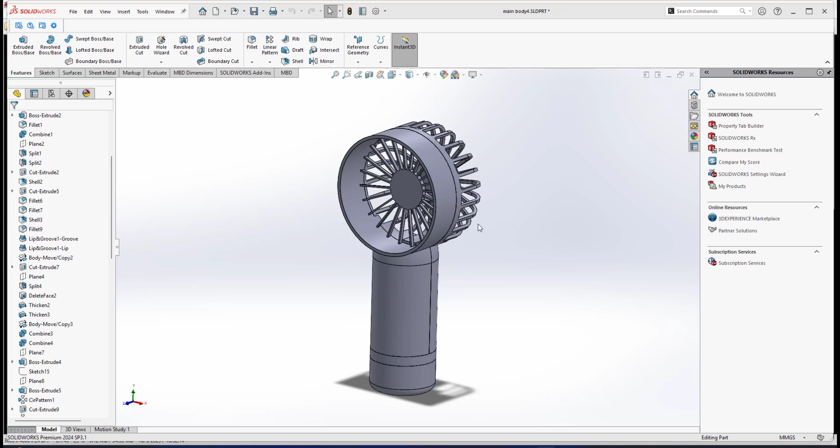Alright, before I proceed in this video, I just would like to say that I have made a few adjustments here. If you see here, my wire channel that I've done is a little bit lower since I've changed it. If you look here under the features, somewhere at the beginning I do a revolve. In my previous video, I made a thickness of 4mm. I changed it to lower, which is 3.

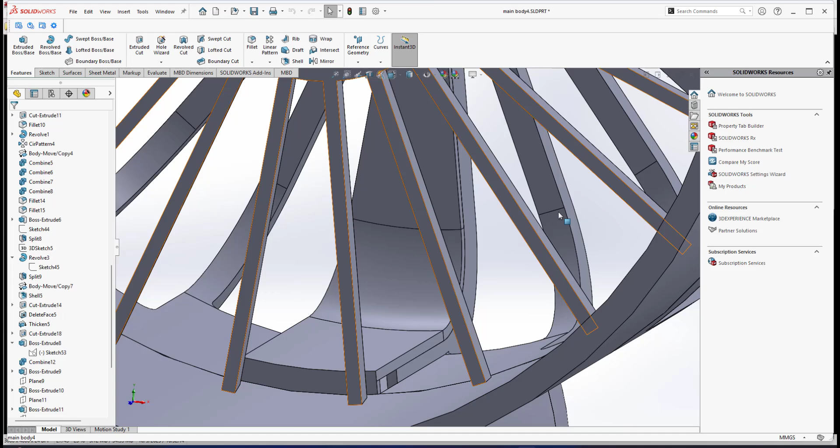So it means that the wall for the wire channel is a little bit lower. Before this, when I made it 4mm, it was too high. So I changed it to 3mm. So this is the adjustment that I already made.

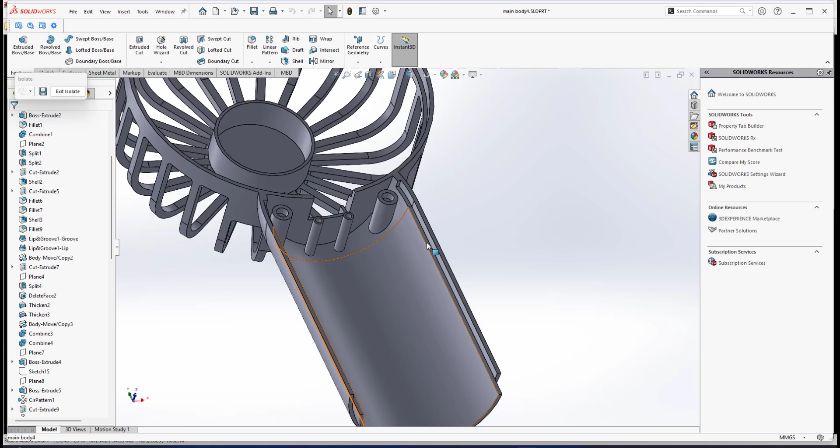Alright, in this video I would like to show you another feature. If you look at the front casing, in my earlier video, my rear casing and my front casing are jointed by this. If you see at this rear casing, we have a groove, and the front casing we have a lip. This was already shown in my part 1 video, how I do this lip and groove manually.

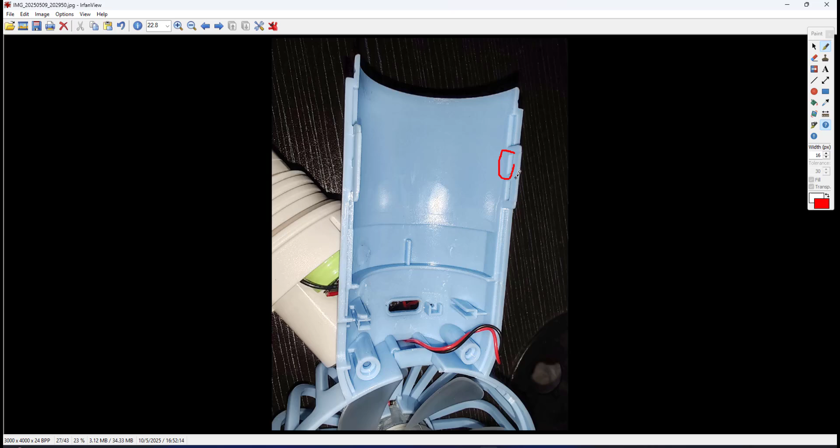Actually for plastic casing, it's not just this feature to joint the front and rear casing. We have another feature. If you look at this photo, this is the rear casing. We have a cutout. This is what we call the groove. And if you look on the front casing, we have the inverse. We have a hook. So the feature is called snap hook and groove.

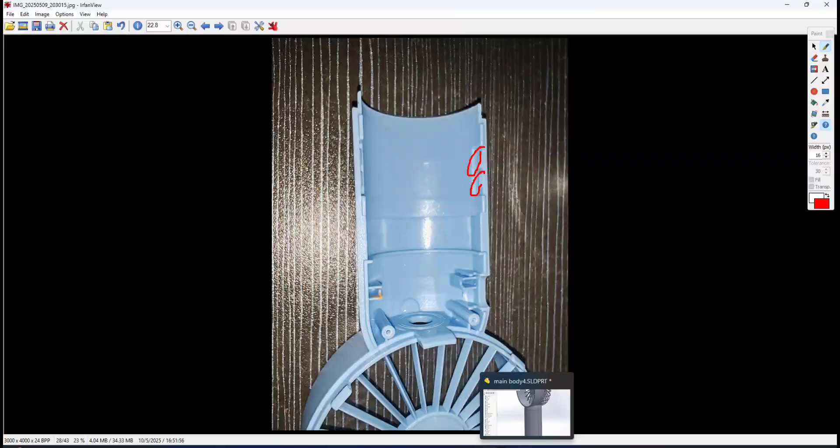But since I want to make a simplified version, I will not follow the same as what is shown here. I make another version of snap hook and snap groove. Alright, let's just watch my video. I do it differently, a simplified version, not the same as what I have in this photo.

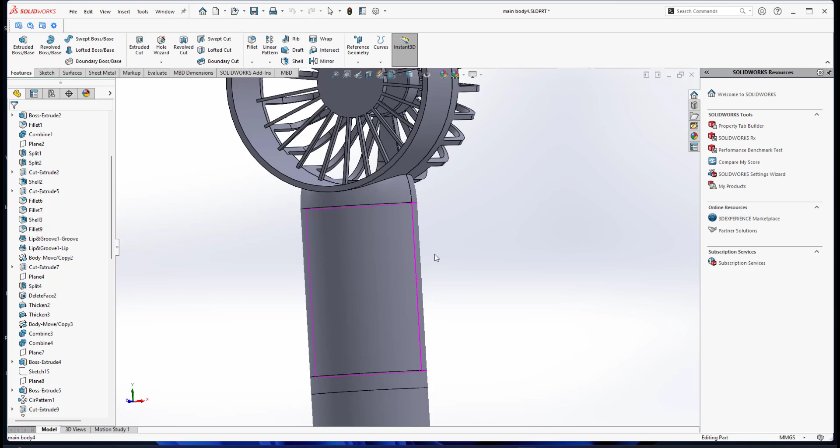Actually in SolidWorks, under Insert, we have fastening features: snap hook and snap hook groove. But I found out when I use this feature, the way SolidWorks does the snap hook and snap groove, the outcome is something I quite disagree with, because it's not the settings that I want. So in this video, I'll show you the simple way instead of these standard features in SolidWorks.

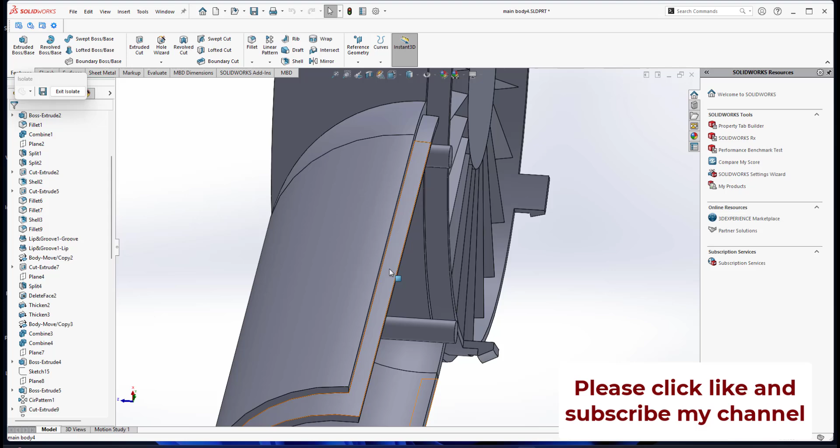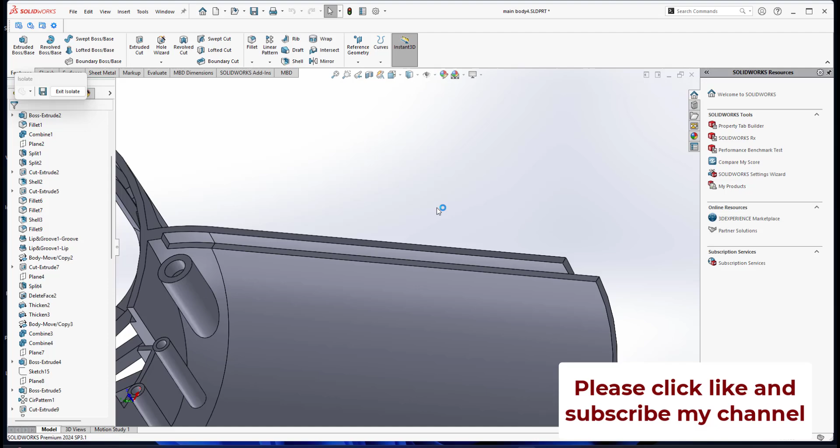Alright, to do this, on the front casing I will create a hook, since the front casing has a lip. I will do it manually with a triangle shape, like a hook. If I have a hook on this lip of the front casing, the inverse at the rear casing will be the cutout, a triangle groove, the snap groove. So on the front casing is a snap hook, and at the rear casing the snap groove.

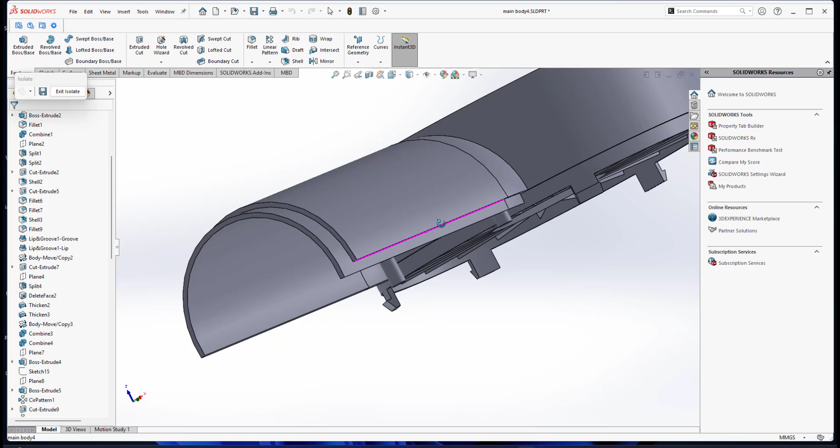Okay, let me focus on this front casing. I will create a snap hook, kind of like a hook shape, meaning the triangle follows this way. I'll show you in this video. If you look here, my right plane is really at the middle there.

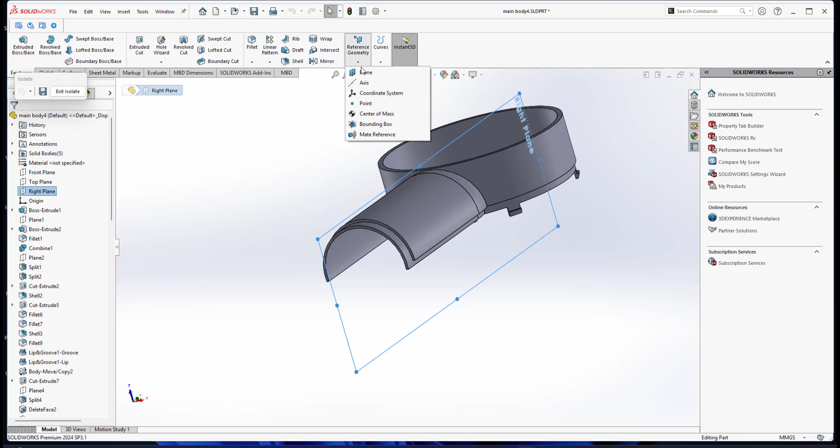So I will use this right plane as a reference to create another plane. As long as I put a distance a little bit further away like this, this new plane will be my reference to create a hook for this lip of the front casing. Alright, so I create a sketch on this plane. It goes in this direction, that's okay. Since I want to create a triangle, first I create just a rectangular shape.

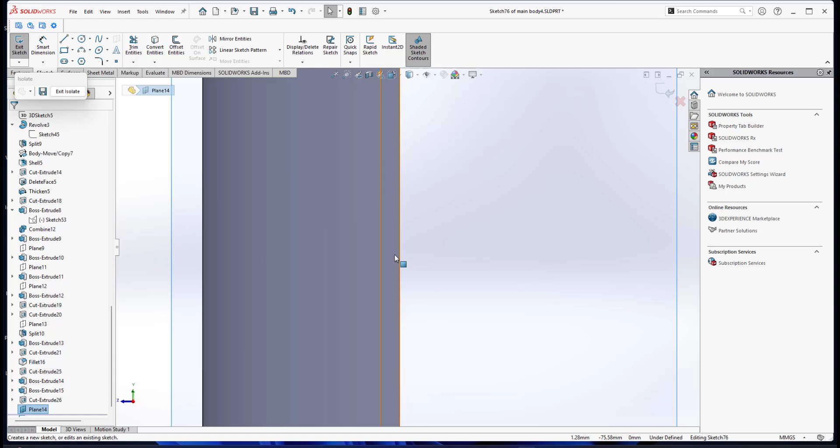Okay, if I create a rectangular shape, I cannot snap at these edges. I found out when I do boss extrude from the surface in which I want to create a snap hook shape, extruding this rectangular shape produces an error, so I need to put some distance as long as it's not touching the edges. Let me delete this first.

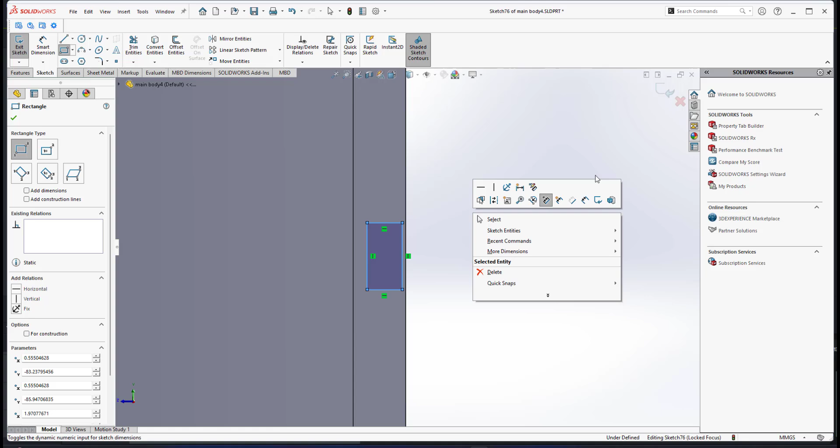Okay, I do the rectangular shape, so I make something like this as long as it's close to that edge, and I put a dimension. I cannot do this edge and this edge. If I put it 0.1, it kind of makes this thing driven, so I just go for the dot here up until this edge.

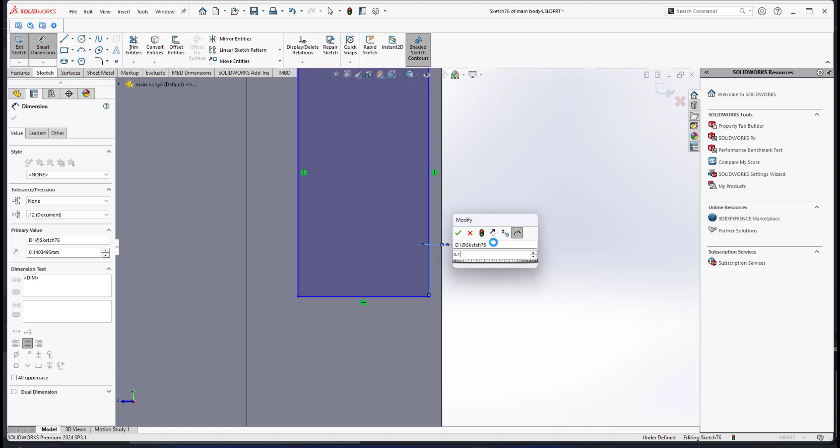Right, I will create another rectangle here, so it means I have two snap hooks. So I create a similar rectangle. First I select the relation of this one. I select this edge and this edge, and I make it collinear, so it means inline. And also this edge and this edge I make collinear, so it's inline.

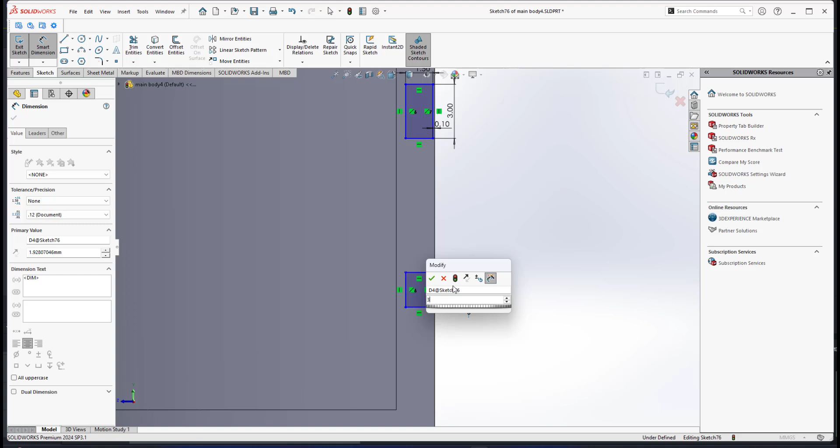So I just give the dimension. This one is 3, right? So I don't have to put this length as 1.5 since I already have the relation. The only thing I need is the distance from here to here, which is 10 millimeter. Later I can adjust it. I simply guess it. The distance between the two keys is 10 millimeter.

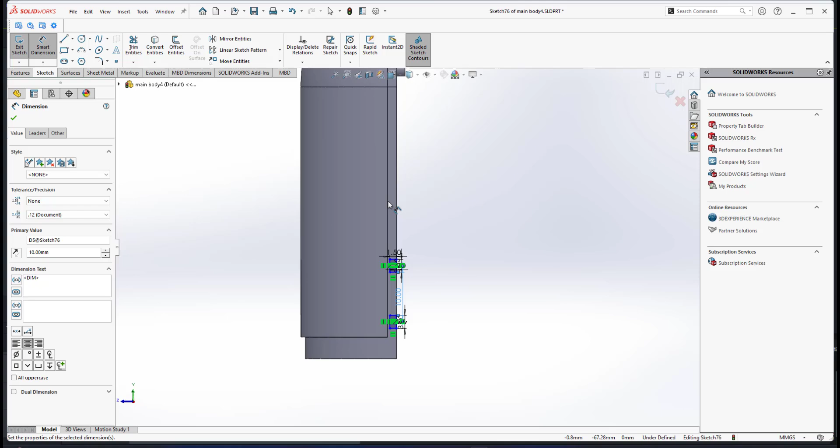Alright, it's still blue color because I have not yet provided the exact location. If I go from this point here to this one, I put it 80 millimeter. Later I can adjust it. I simply guess the position of the snap hook. Okay, now I have this thing.

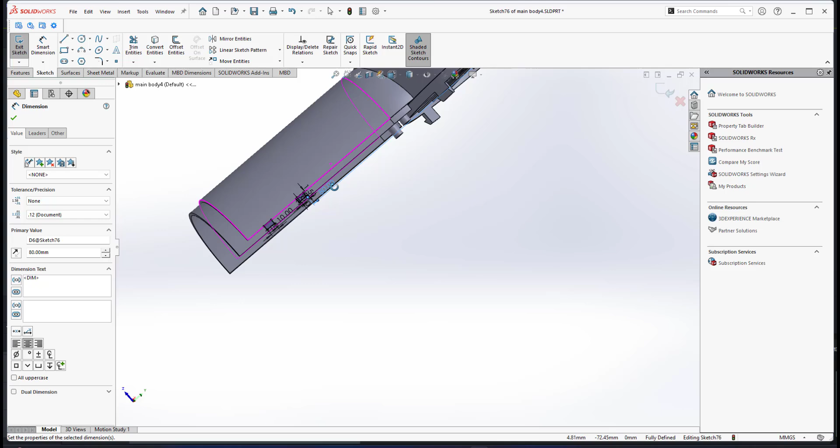Okay, as you can see here, I will create a snap hook feature. I have these two cross sections of this rectangle. So in features, I will do extrude. Extrude by default starts from the sketch plane. I'm not using a sketch plane. I go for the second option, start from the surface. I want the snap hook to start at this surface of this lip.

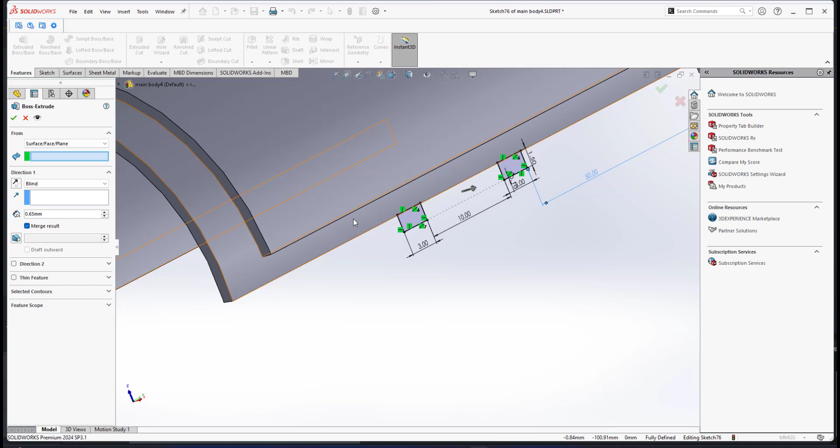So I have the preview there. It starts at that one. I will not click merge result, since I want to make it as separate bodies. Later I will show you why I make it as separate bodies, right? The distance that I want is not too much, about 0.65.

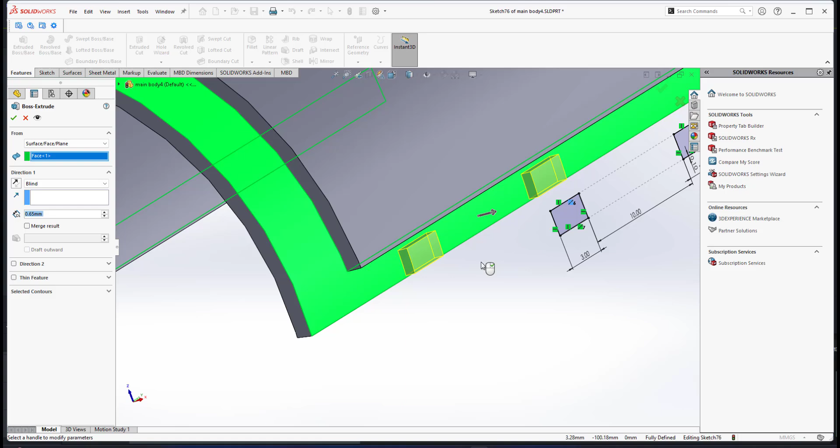It's less than half, since the thickness here is 1 millimeter. So it means a little bit, not more than 1 millimeter. So I put it about 0.65. All right, 0.65. Okay, then I uncheck the merge result. I want to make it as a separate body.

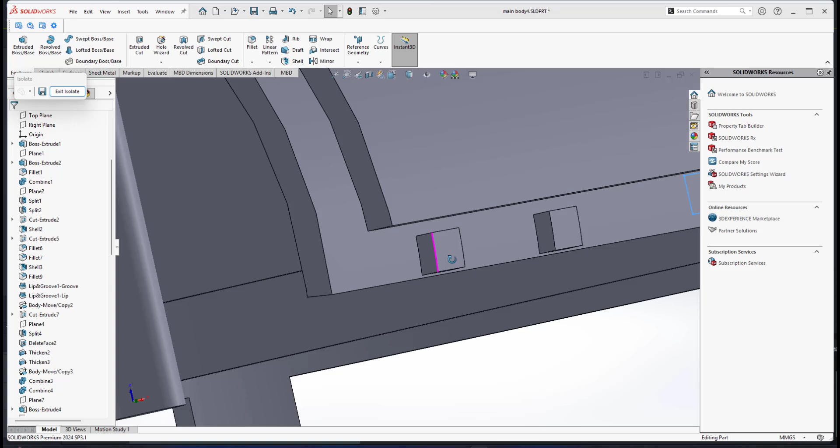So now, if you look here, I have this. If I exit my isolate, I have these two rectangular boxes. If you look in the list here, I have two of these: the first rectangular box and this one. So I isolate these two boxes, these rectangular boxes.

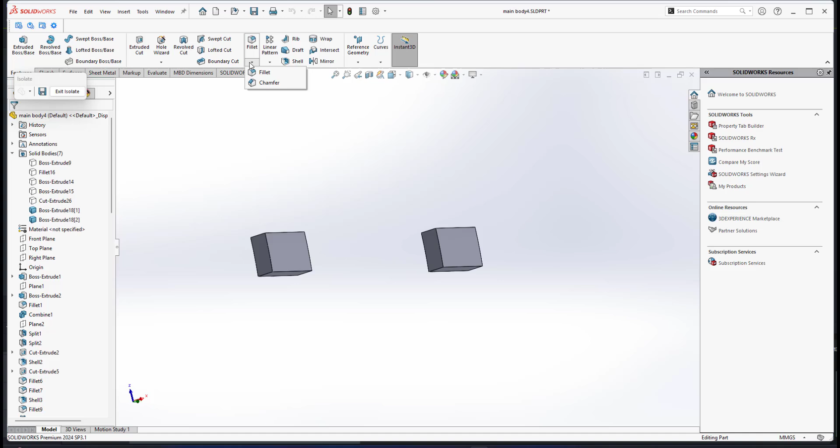So I will do chamfer to create a triangular shape, the shape of a snap hook. Okay, I will do chamfer. For chamfer, I'm not using the first option. I go for the second option, distance 1, distance 2, and I'm not going symmetric. I go for asymmetric. Distance 1, I already played around, is 1.7, and distance 2 is 0.5.

If I select this edge, I have this kind of cutting, which produces a triangular shape. And also I select this edge as well. Okay, maybe go one by one. Let me do it one by one. I click this one first. Okay, so this is my first triangular shape.

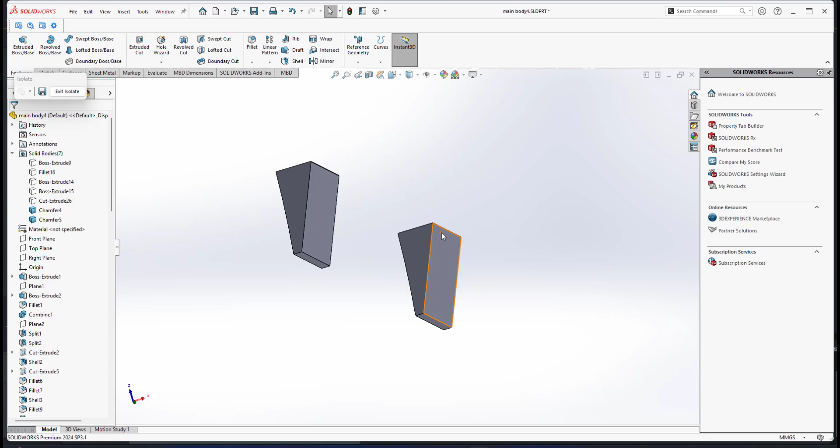So I go for another one, chamfer. I'm using the same thing, the second option, asymmetric, 1.7 and 0.5, and select this edge. So I have this shape. This will be the shape of my snap hook. All right.

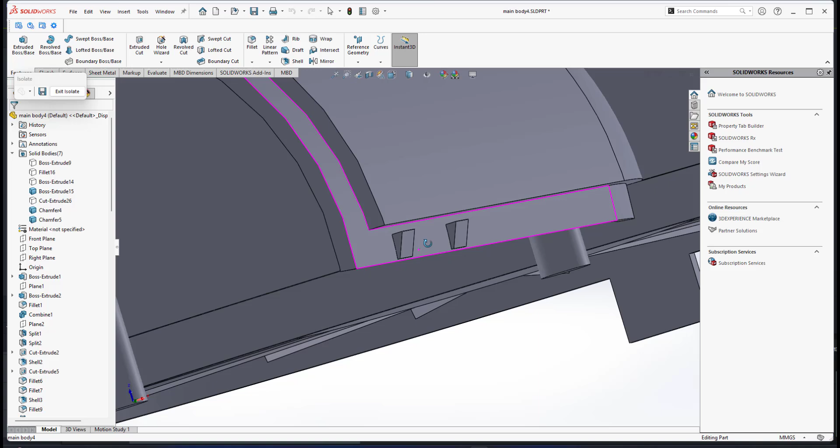If I exit, I select this one, it is attached to the... Okay, if I select the front casing and also the two snap hooks that I just created. So this is a separate body. So I'm not merging this as one by using combine add.

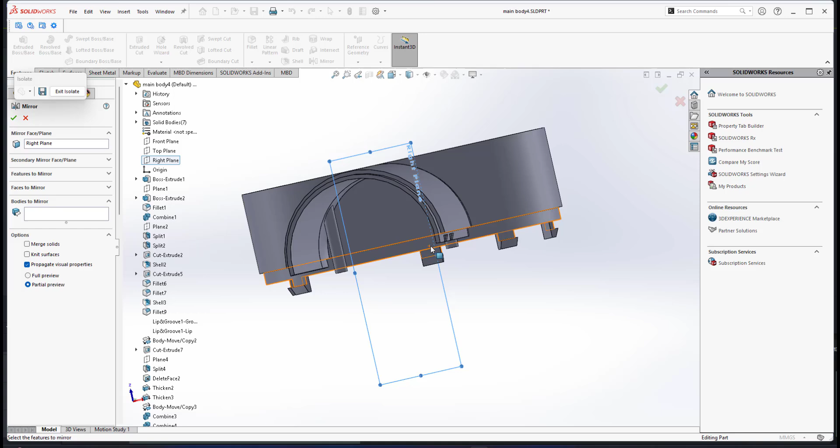So what I will do on the other side, I will mirror it. So I will do mirror. My mirror plane will be the right plane, since the right plane is laying in the middle. I'm not using features to mirror, I'm using bodies to mirror, since there is a separate body. Make sure to click on bodies to mirror, because the snap hook here is a separate body.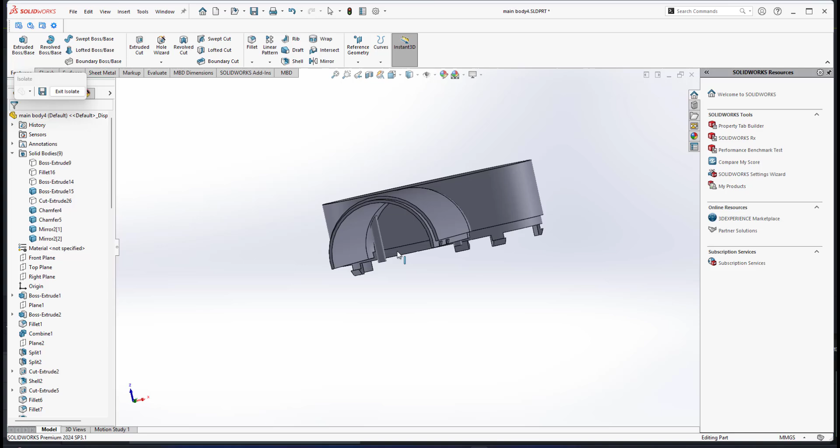So I will select these two snap hooks here. Carefully select this snap hook. So I have a preview on the other side. Then I click OK. So I have 4 snap hooks here. Alright. Okay, these 4 snap hooks, I'm still not merging them into one object here.

I will duplicate it, since the idea is that the original of these 4 hooks will be merged as one to this front casing. The copy version of it will be a subtracted version. So on the rear casing, it will create a snap groove.

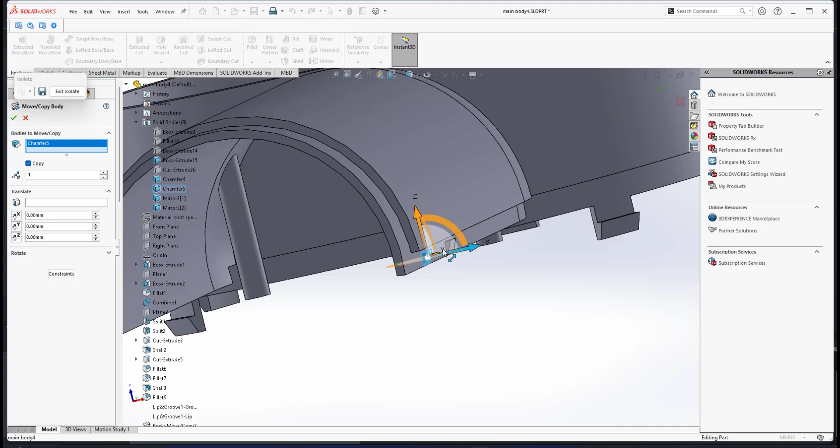Right. So what I will do, I will duplicate it by copy, then make sure copy is 1 and copy is checked. I select the 4, carefully select these 4 hooks that I have just created. So I make a copy version of it, then just simply click OK. Okay, now I have a duplicated version of those 4 keys.

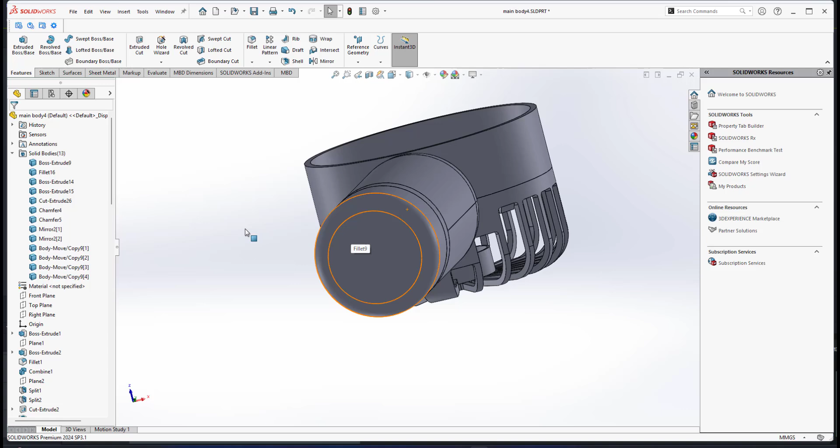Right. So now if I exit isolate, now I will do combine add and also combine subtract. Okay, the original one will be this one, and I select the original here. I will select the front casing and the original 4 hooks that I just created. I isolate it. So this one I will merge as one.

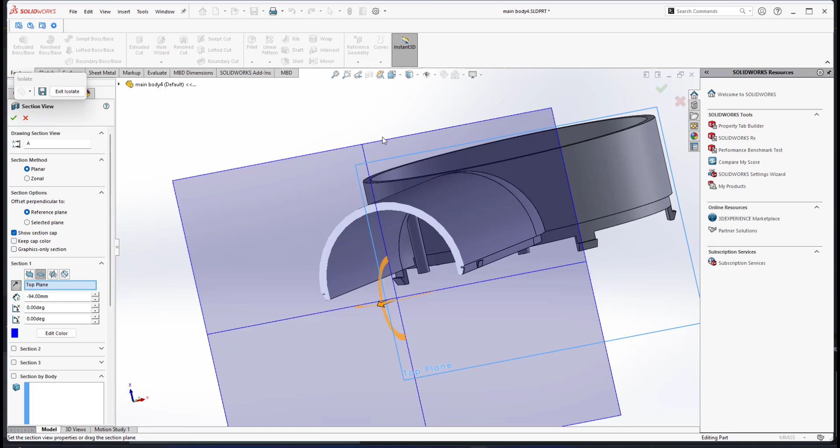So I will go insert features. I will do combine and I will go for add. I select these 4 keys. These 4 keys I add as one. So now it's already one. I just simply check by section view to make sure that the merging is blended together. I don't want any extra edges created.

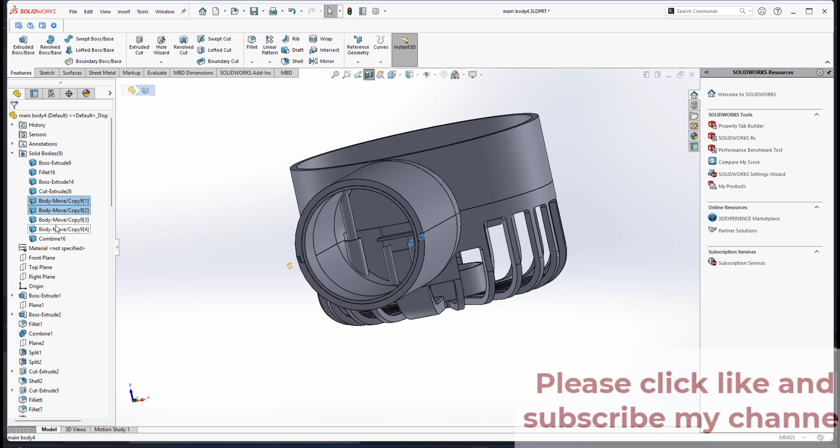If I go for section view, it nicely blends, right? The 4 keys, right? So this will be the snap hook. All right. Okay, if I select the copied version of that snap hook and the rear casing, I isolate it. So this one I will do subtract. So this one will become the groove.

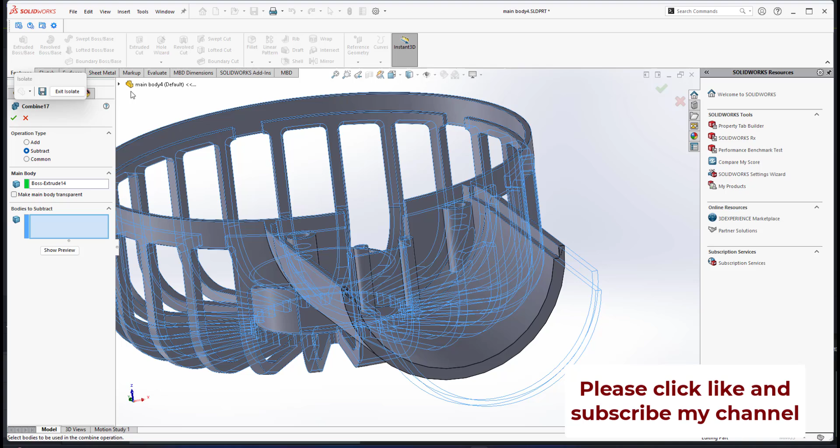So I will go for features, combine. This one I will go for subtract. The main body is the rear casing, right? Okay, hard to see because it's kind of merging inside. So the bodies to subtract, I will select the 4 copied versions of the snap hook. I can select from this list. If I click here, let me zoom out like this.

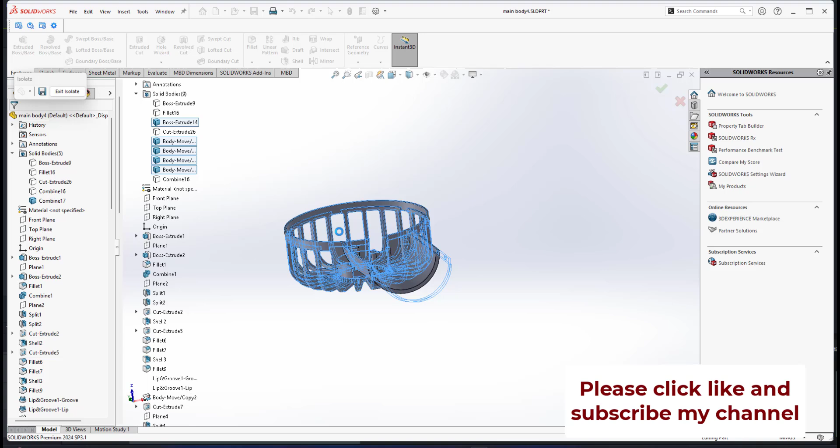Okay, this one body, I select all these copied versions of that snap hook. So this will be subtracted from the rear casing. Okay, if you look here, this is section view. Right? If I uncheck the section view, as you can see, we have a cutout. So this will be the snap groove, right?

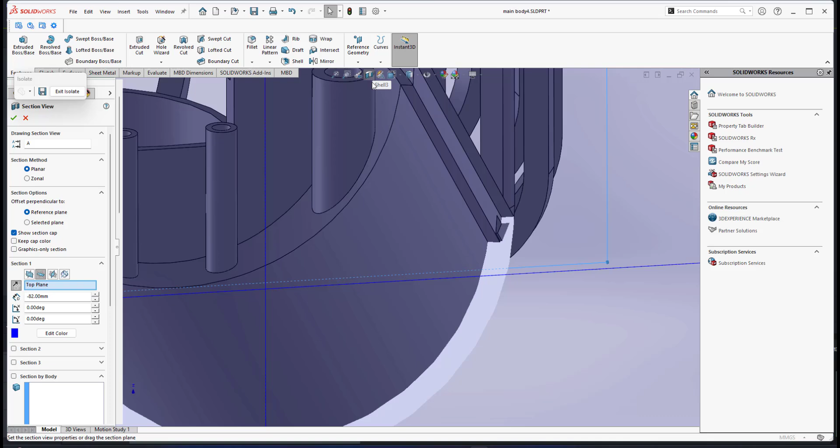So the reason I make the thickness 0.65: if I go for section view, just to show you, if I make the thickness of that triangular section 1, we still have a gap here, right? So that's why I make the distance 0.65, for the shape when I do the extrusion of the box, right? Because this is the manual way for me to do snap hook and snap groove.

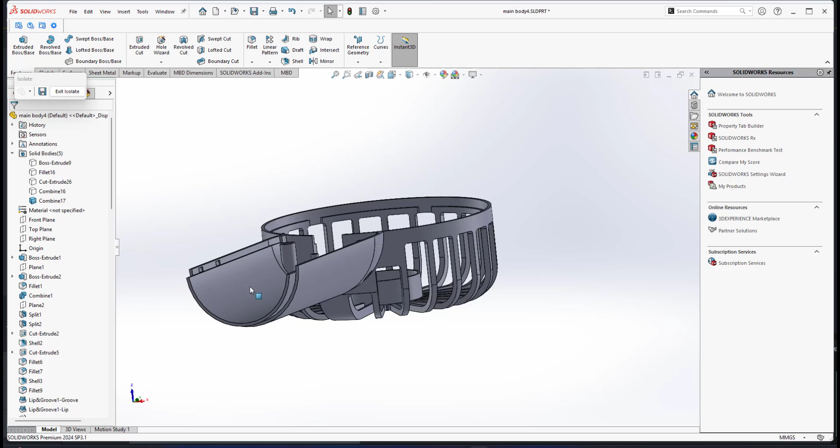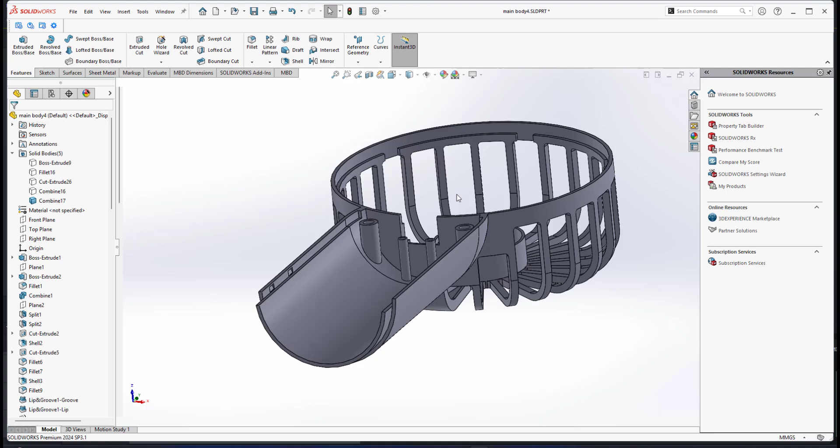Because I found out if I use the standard features here, I'm not satisfied with the result when I use the snap hook and snap hook groove. But it depends on how you want to do it. So this is my way I do it: manual snap hook and snap groove. Okay, let me exit my isolate, and I go for standard view. Okay, and I save my file.

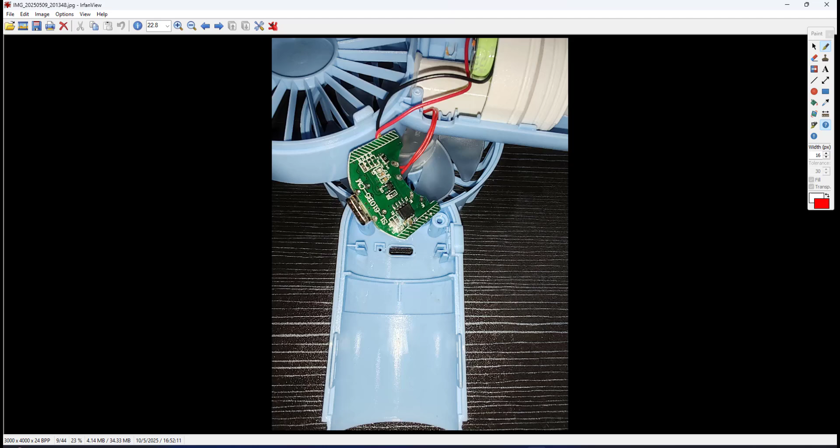Alright, my next move, if you look in this photo, we have features here. This is a rear casing. We've already shown how I've done these two cylinders. On this photo, the cylinder is already done with holes, but on the front casing we have two pins. So the rear and front casing will be jointed by fastening with a screw.

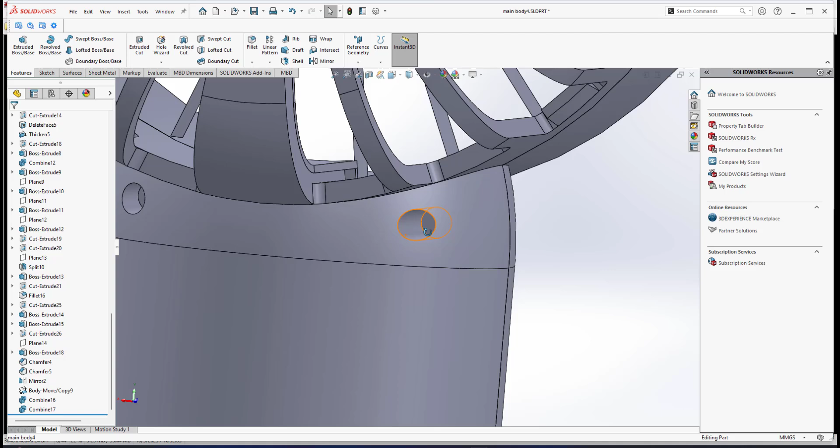To do this, if you look at my main modeling, I have holes here. I will put a screw into position, then later I will show you how I will create the inner thread for this rear casing and also the front casing. So I need to insert the screw.

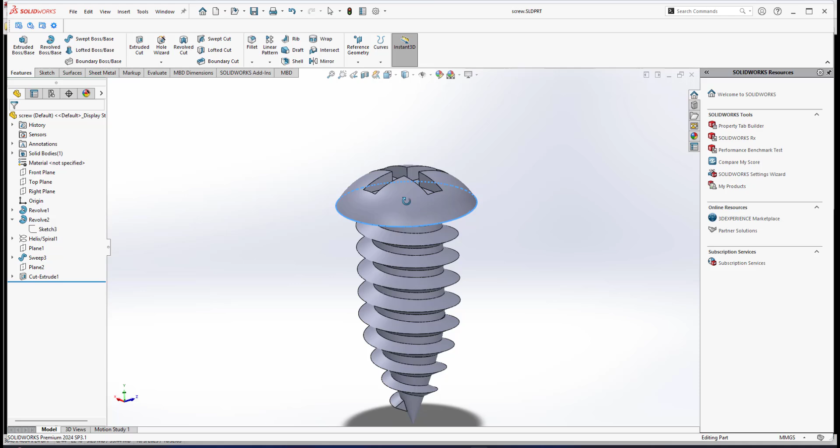Actually, I have done part modeling of the screw. If I show you here, this is the part modeling that I've done for the screw. The screw size is metric 2.5, meaning the major diameter from peak to peak is 2.5, and the head of the screw has a dome shaped head. If I evaluate, the diameter of the head is 3 millimeters, so it can nicely fit onto my main modeling file here, since the diameter of this hole is 3 millimeters.

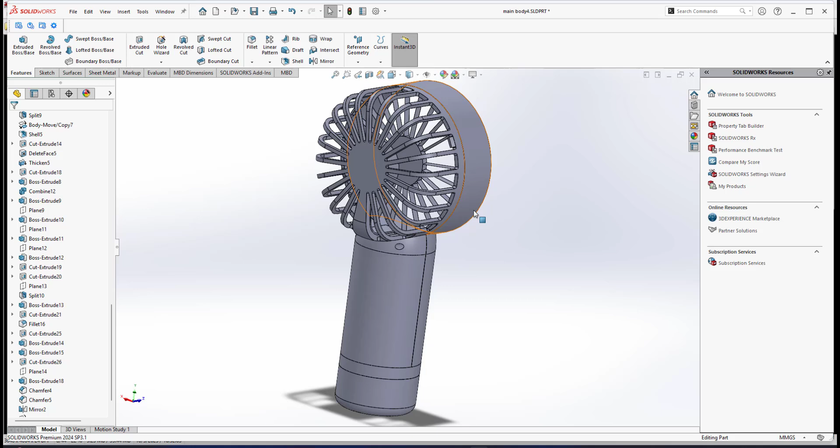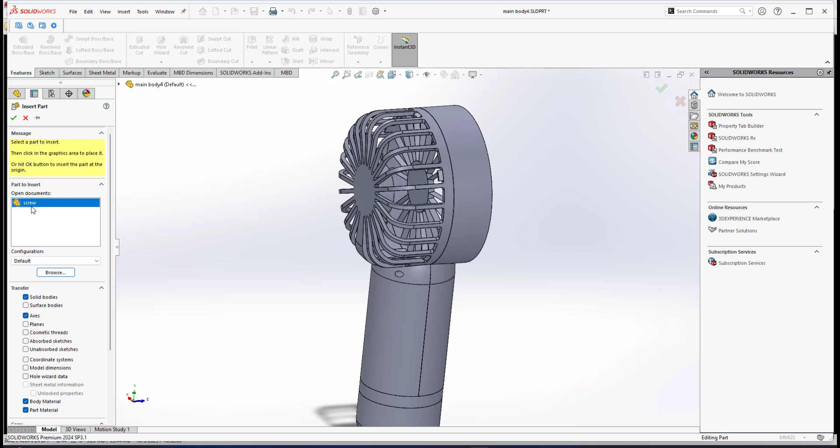In SolidWorks part modeling, you can also insert other parts into your part modeling file. To insert the screw into this main modeling of my portable fan, I use this: under Insert we have a menu, click Part, and you can browse to which folder you saved your part file. In my case I already have the screw, so I will place it on the left side here.

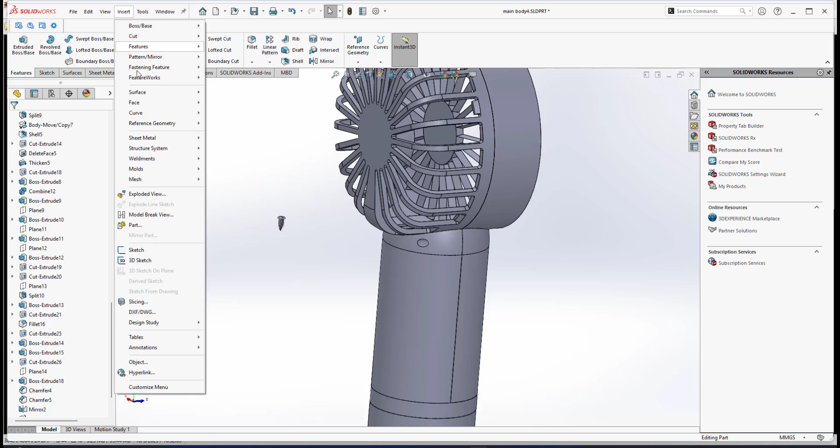So I put my screw in position. Now my screw is initially placed at this position. Now I can move the screw into the exact position where it will fit into this surface. To do this, in SolidWorks we have Insert Features, we use Move Copy, then I select the screw. The screw is already selected, but to move it into position I will not use this setting.

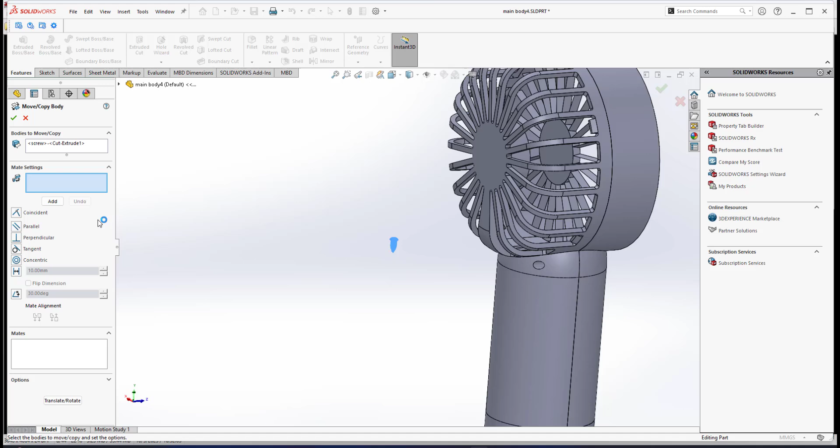I click at the constraint here. This is another setting, a mate setting. This interface you will see when you do assembly in SolidWorks, but this is still in part modeling — mate settings about relation. Since the screw has a cylindrical surface, I will select the cylindrical surface of the screw, so it will have the same relation as the cylindrical surface of this hole.

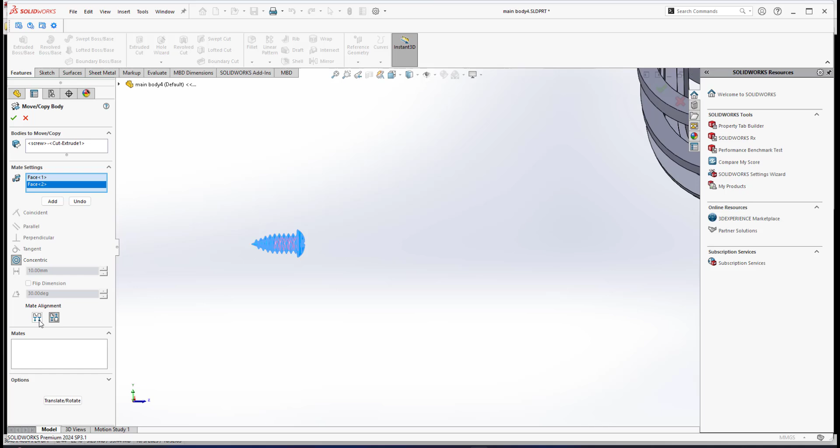If I click at that hole, SolidWorks automatically puts the screw into position. But before I click Add to confirm, the orientation of the screw is turned toward the other direction. So here I have the option for mate alignment. Instead of using the right one, I click the left one, and now the screw is positioned in the correct direction. So I click Add. When you click Add, it's already read at the bottom here — I have the concentric relation between the screw and the hole.

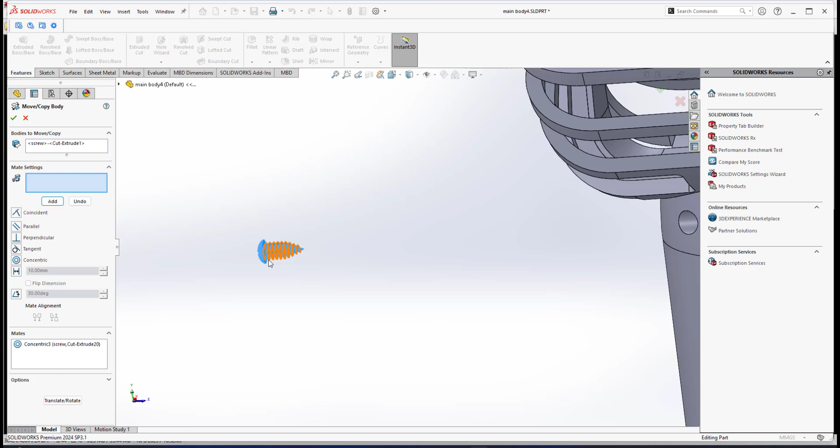So I will do another setting. My second setting is that I select the flat surface of the head of the screw to touch the flat surface of the hole here. Now the screw is in place. I must click Add first, then click OK. Now the screw is in position.

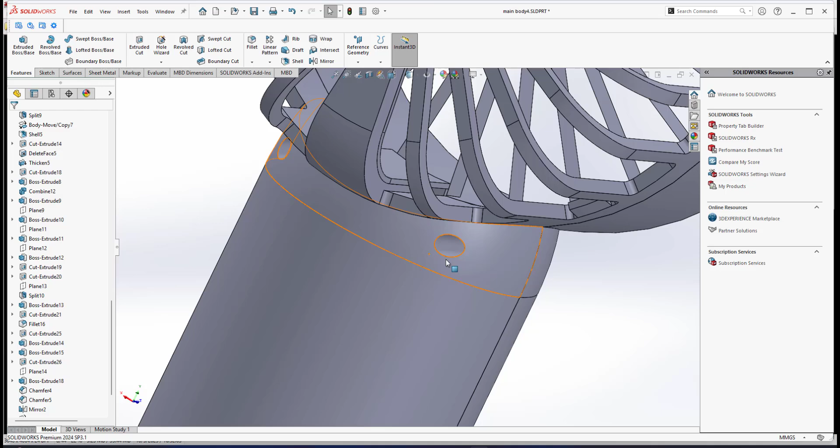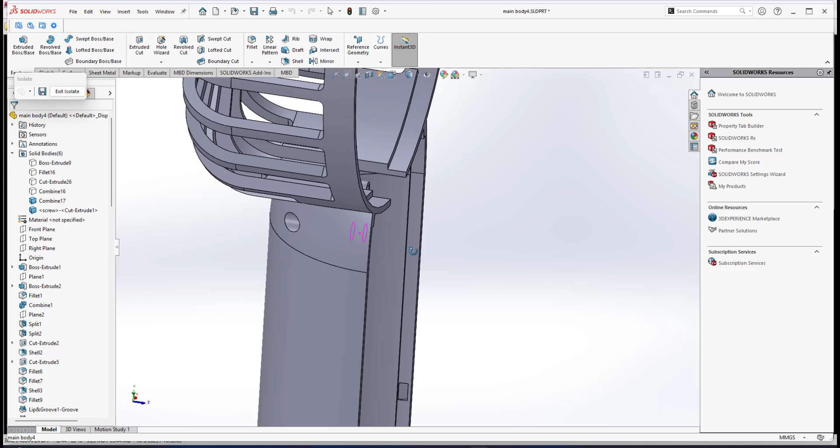Alright, about this screw, let me show you. Now I have the solid body, the screw, and I also select the front casing, the rear casing, and the screw — so the screw is in place. If I go for section view, just to show you the top view, if I drag the top view up like this...

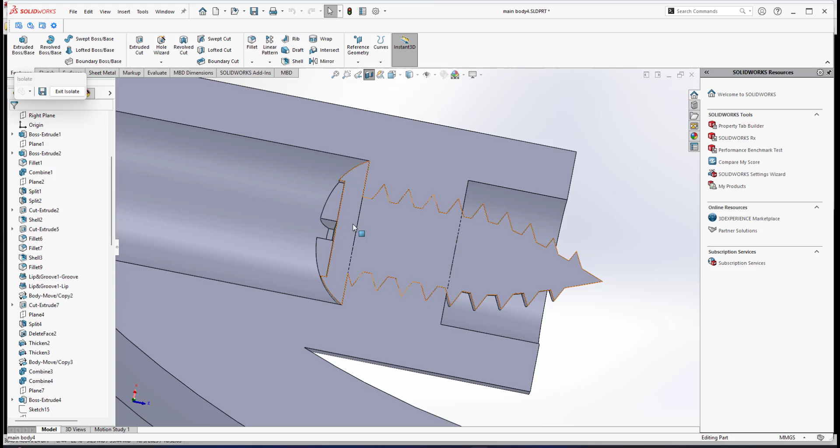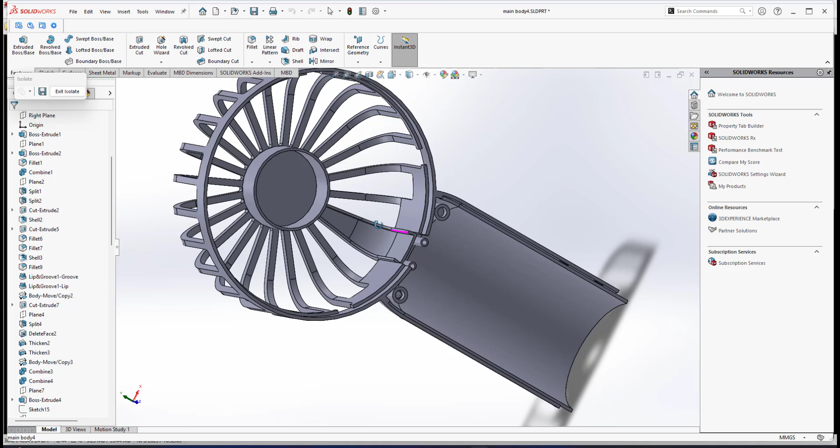As you can see here, now the screw is in position. I need to subtract it. Since this is the cylinder of the rear casing, I need to subtract the screw to make an inner thread in this hollow cylinder. But before I do that, let me turn this off. Since I have two things, I cannot duplicate. If I make a mirror representation of the subtracted version, this is not correct, because the inner thread I create would also be a mirrored representation, so it's not right.

So I need to insert again another screw, put it into this position, then repeat the same procedure — I will move it.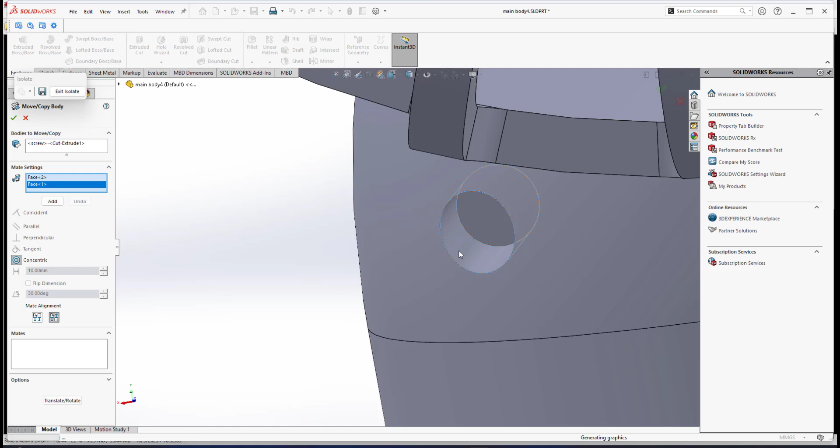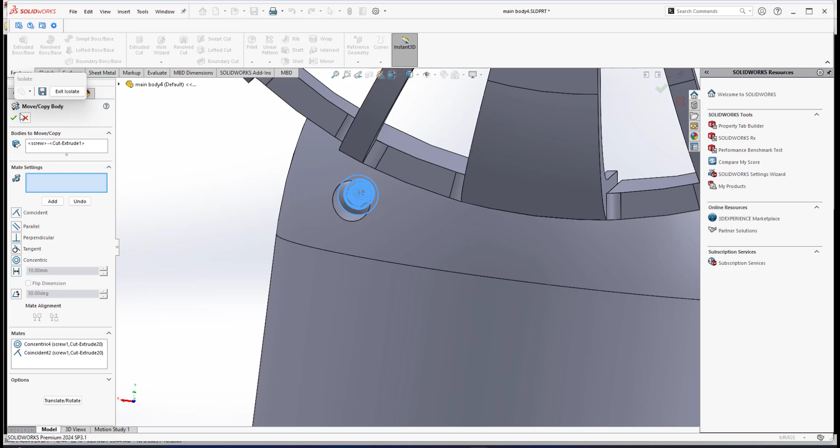So this screw, I select it to be moved. Then I use the mate setting. I select the cylindrical surface of this screw, and it will mesh with the cylindrical surface of that hole. Here, for mate alignment, I go to the left option, so it turns to the right direction. Then I click add. My second setting will be this flat surface touching this flat surface. Now the two screws, if I click OK, make sure you click add first when you do settings, and now the two screws are in position.

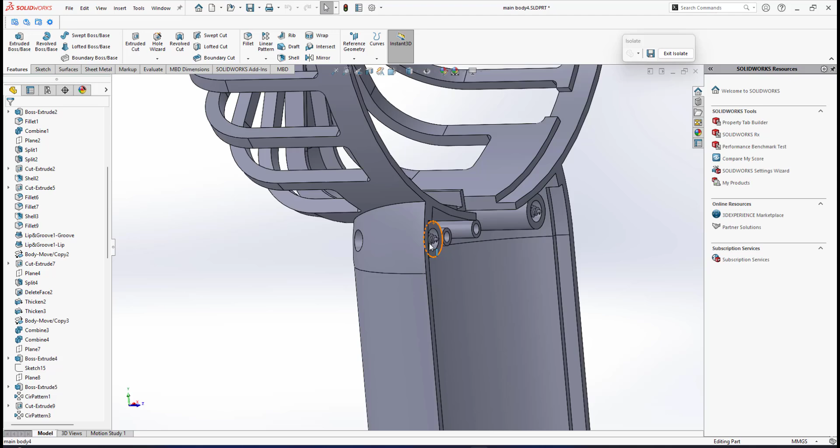Since this two screw is in position, the first thing is these two screws, I will do subtract to create the inner thread for this hollow cylinder. But instead, later I will do another version of this screw, then I will subtract for the front casing to create the inner thread for the front casing. But before that, I duplicate this two screw.

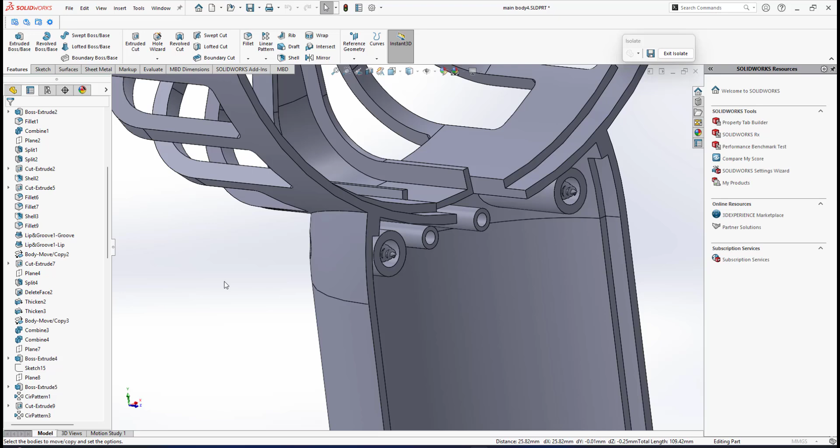Now I already put this two screw in position, so I select it. I will duplicate it using features, then make move copy. Instead of using constraint here, I go for the setting translate rotate, so I go to this interface. For bodies to copy move, I select again this one and this one. I make a duplicated version, make sure copy is checked and number is 1. So I click to make a duplicated version of these two screw.

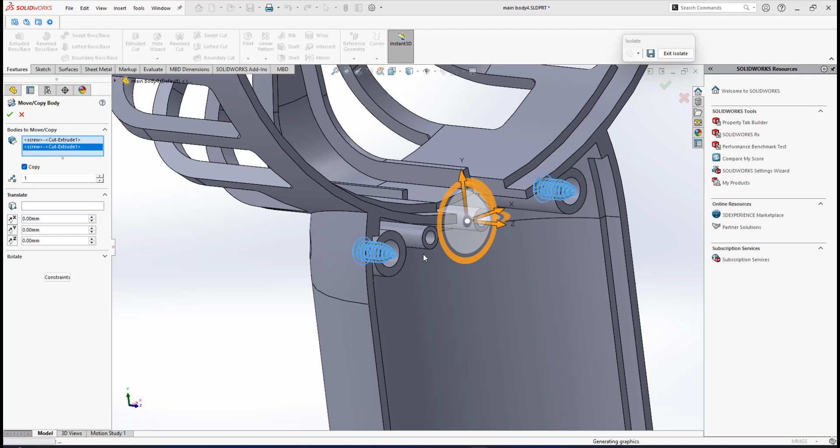Let me show you now. If I exit isolate, if you look here, I have this rear casing, and this screw is the original screw, and the body here is the duplicated version of the screw. So I will select the rear casing and the two original screws that I already put in place, and I will isolate it.

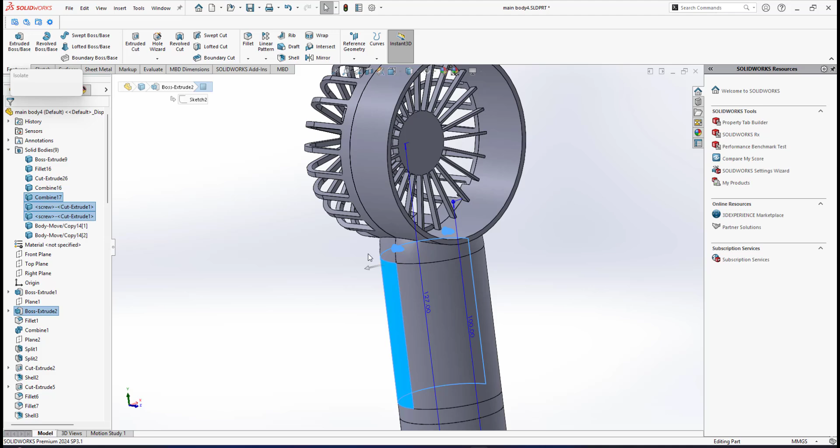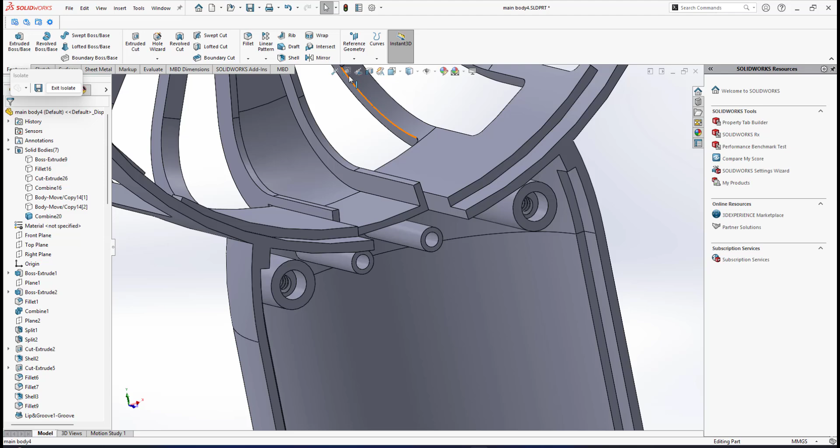For this one, I will do subtract. So insert features, combine, and I do subtract. The main body is the rear casing, and bodies to subtract are these two screws. I select these two screws. Now if I click OK, as you can see here, if I show you the section view from the top plane, now we have inner thread for this hollow cylinder.

Same goes here. If I turn this off, now I will do the same. I exit isolate. For the front casing, also this is the front casing, and I select the copied version of that two screw, and also the front casing, and I isolate it.

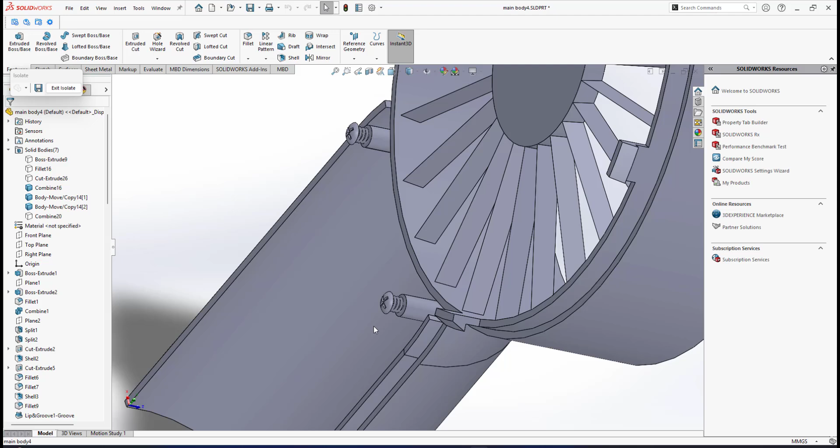So I will do the same thing, and now we have these two screws, and here I use subtract again. The main body is the front casing, bodies to subtract are these two screws. If I click OK, now as you can see, the front casing has the inner thread. So that's how I do things.

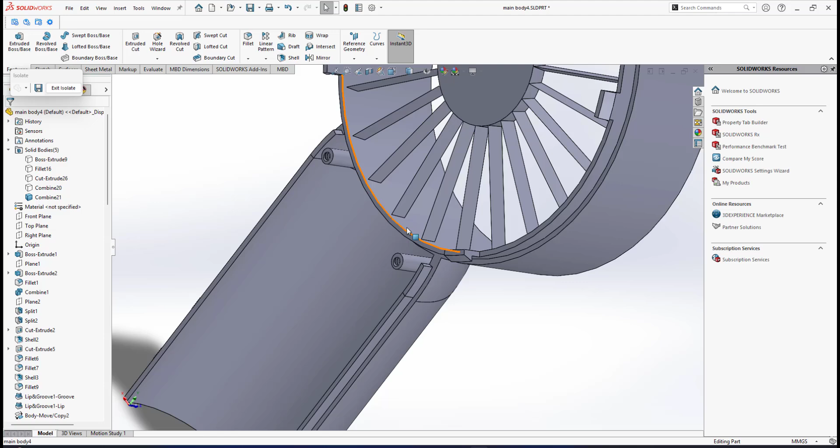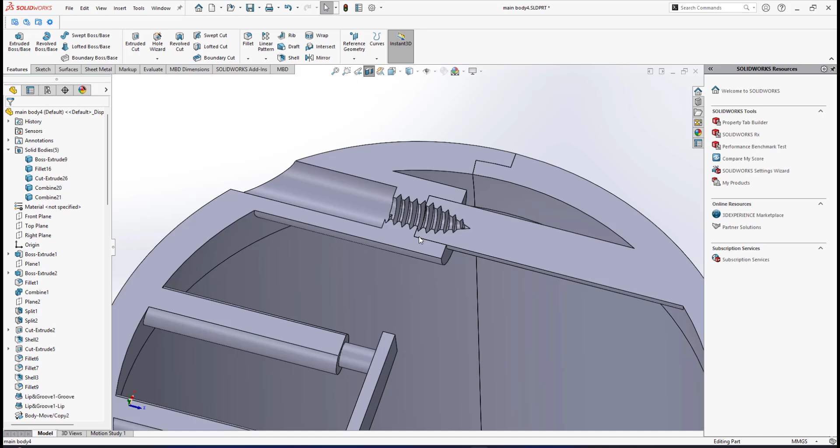Since this is a plastic material, we need to provide the inner thread for these two pins and also the rear casing hollow cylinder. That's how I do things to make these features, so we have the inner thread. If I show you again the section view for this top plane section view, as you can see, both the rear casing and front casing have the inner thread.

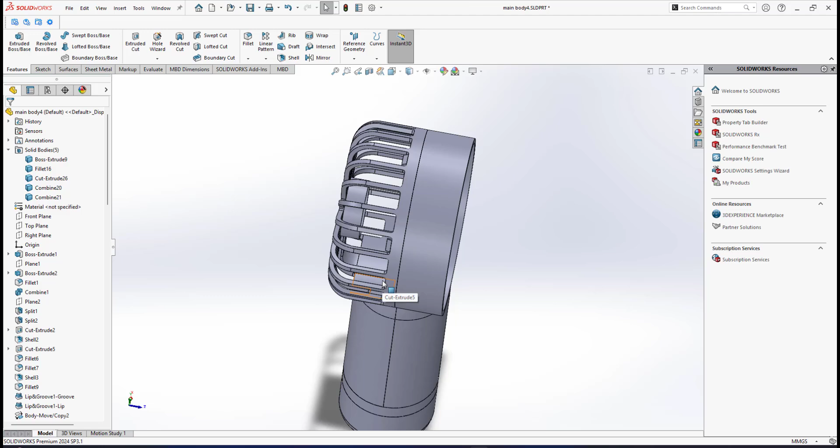In this part modeling, I will not put screw, since the screw that I insert in this part modeling is meant for me to do the inner thread. Later, when I've done modeling all the parts, then only in assembly mode will I show you how we do assembly. So for this case only, I will show you how I do the features of the inner threads. Let me save my file.

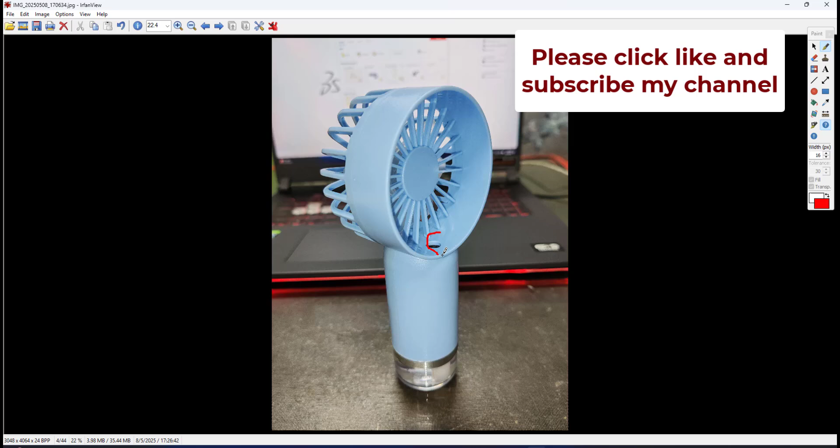I think I stopped this video at this position. All about the other features, like this photo, we have other features, like holes here on the front casing. This hole I will do, positioning the hole after I've done modeling of the mist maker unit. Here, this is a mist maker. After I've done this and placed the mist maker into position, I will know the location of the holes. Also, on the rear casing, we have holes here for the USB port. After I've done the modeling of the PCB board and placed it into position, then only will I do more detailing on this rear casing, also this front casing. So I stop this video up until this position.